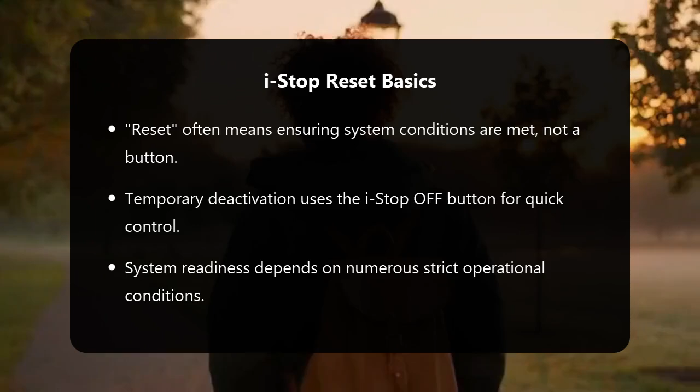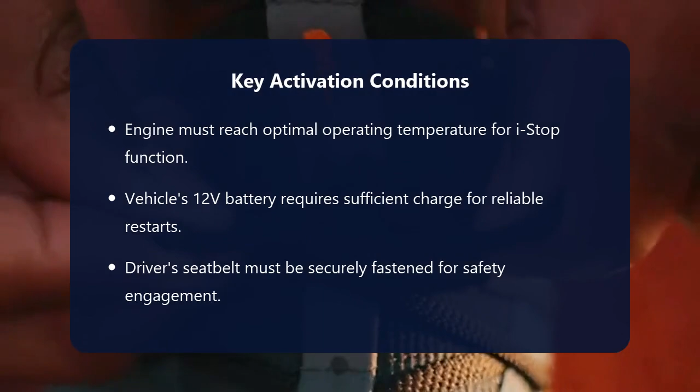If your iStop system isn't functioning as expected, the first step is to ensure it hasn't been manually turned off. There's a dedicated iStop off button, usually located near the steering wheel or on the center console, often depicted with an A surrounded by an arrow. Pressing this button will temporarily deactivate the system, and the iStop off indicator light will illuminate on your dashboard. To reactivate it, simply press the button again, and the light should turn off, indicating the system is ready to operate when conditions are met.

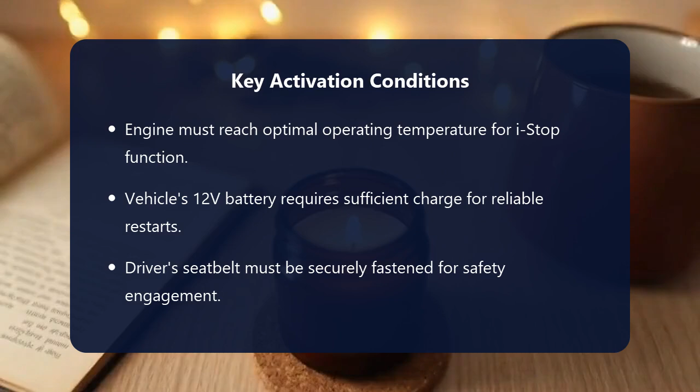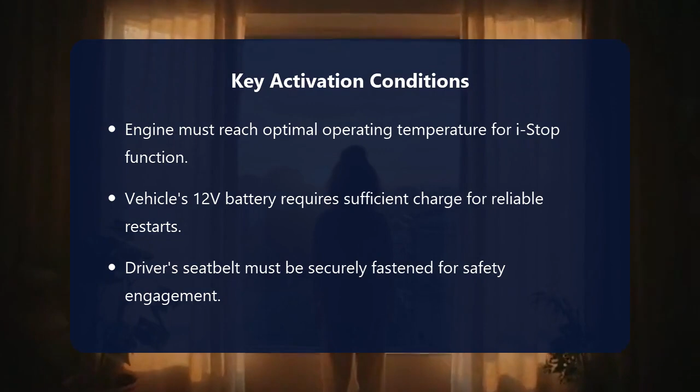However, if the system is on but not engaging, it's likely due to one of the many strict operating conditions not being met. These conditions include the engine being at its optimal operating temperature, the battery having sufficient charge, which is a critical factor for iStop, the driver's seatbelt being fastened, the steering wheel not being turned sharply, the vehicle not being on a steep incline, and the climate control system not demanding excessive power.

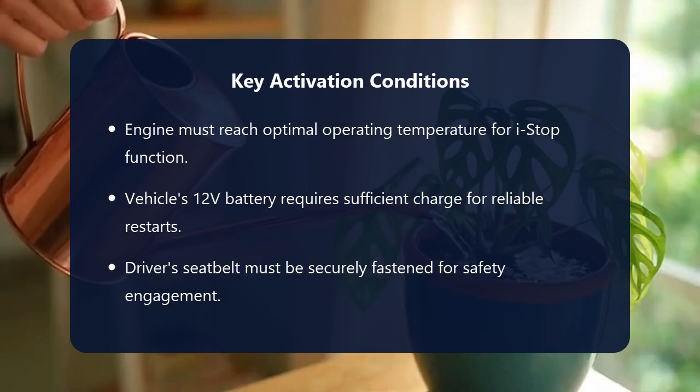For example, if your air conditioning is set to maximum cooling on a hot day, iStop might not engage to maintain cabin comfort. Similarly, a weak or aging battery is a primary culprit for iStop not functioning, as the system prioritizes reliable engine restarts. The closest thing to a reset or recalibration often comes after you've disconnected or replaced your vehicle's 12V battery. When this happens, the iStop system, along with other vehicle electronics, may lose its learned parameters.

Mazda vehicles, especially after a battery change, often require a specific iStop battery sensor learning procedure. This isn't something you manually trigger with a button sequence, but rather a process that the vehicle's computer undergoes as you drive. Typically, this involves driving your CX-5 for a continuous period, often 10 to 15 minutes, at varying speeds to allow the system to relearn battery charge levels and vehicle dynamics.

After this initial drive, it's often recommended to let the car idle for about 5 minutes with all accessories off to further aid the learning process. During this period, the iStop indicator on your dashboard might flash orange or green, indicating it's undergoing this learning. Patience is key, as the system needs time and specific driving conditions to fully recalibrate.

If, after checking all conditions and allowing for a learning period post-battery work, your iStop still isn't engaging, or if a warning light related to iStop appears on your dashboard, it's advisable to consult your owner's manual for specific troubleshooting steps or to visit a certified Mazda service center. They have diagnostic tools that can read specific fault codes and perform any necessary advanced resets or repairs.